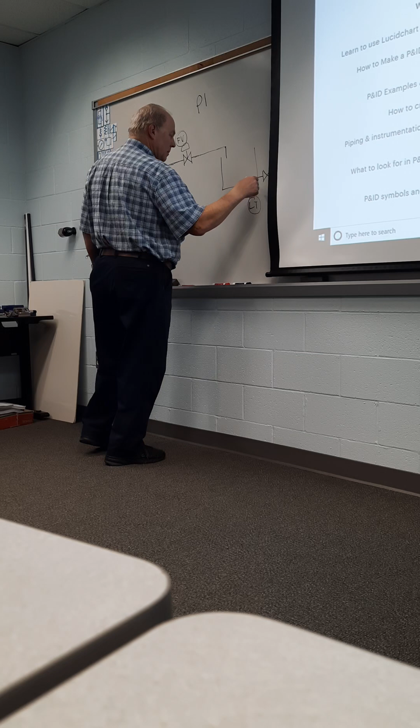If I'm trying to set a rate of flow to fill up a tank, and I have the ability to control the flow here, and also the ability to control the tank level as well. If I want to fill up tanks at a certain rate, I usually calibrate the flow first. Maximum flow, minimum flow. So it does imply that I worry about calibrating this part of the loop first.

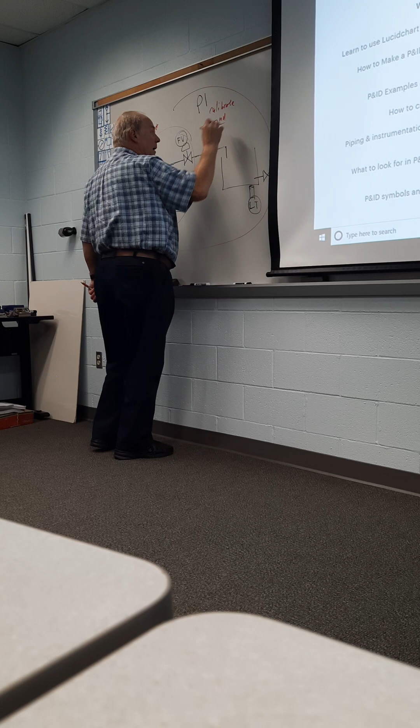Then if I'm worried about the tank level, achieving that, I calibrate that second. I split it into two different calibrations for the system. The reason being is I can go back and forth. If I calibrate this first, it still doesn't take care of the flow, so it may fill this in too fast, too slow, whatever. The overall loop doesn't optimize getting the level I want.

So really look upon this as a component of this overall loop. The overall loop being the measurement, coming back to a controller, that forms a closed loop, just like the flow. If I put a flow meter here, or even estimate the flow, that's a separate loop. This is a case where I want to be able to break that down. Now, it's easier to see if I have it on a P&ID like this. I can definitely identify two loops.

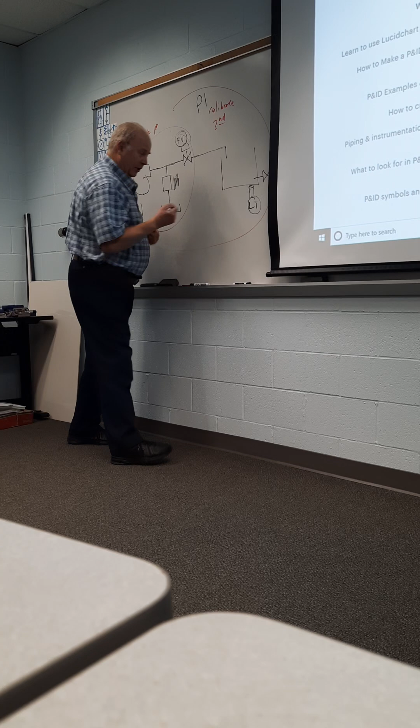This overall loop might be 100, in which case the flow loop here might be 101. F for flow, L for level. Something of that order. And this is concentrating on the flow, where I worry about an estimate for how fast I can fill up a tank, and then filling up the tank afterwards. This might be adjustable too.

This is probably not the entire system, but just a part of it to show why we have subloops. In tuning, we usually want to do the component subloop first, then the bigger loop that incorporates it, treating the subloop like a lower level component. It's a layered approach.

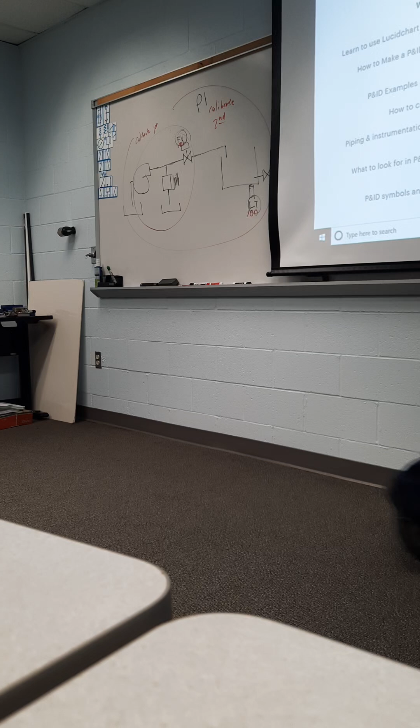A lot of big processes are complicated. There are multiple little loops. And tactics go bottom up as far as calibration. Because for a component to calibrate a valve, like a diaphragm valve, it doesn't really matter what part of the loop it is. That's not going to affect that valve operation. So do that first, get that optimized, working. In other words, I've unplugged it, unclogged it. The bladder's working properly, that sort of stuff, maintained, it's not leaking, because that affects things.

And once that's a perfectly working one, then I work with a small loop here, which in this case would be the flow rate measurement, to make sure I have that correct. And then once that's corrected, then I have a reliable flow that's optimized, and I can worry about what level I get in the tank. But as soon as I worry about the level in the tank, and then recalibrate the flow rate, I might improve the flow rate, in which case that level's getting filled faster than I expected.

Possibly, something else might be going on as well. But you don't have the reaction time for the level. A faster flow rate that's unaccounted for might fill the level of the tank too fast. Later on in the course, when I talk about calibration of loops, we'll see one of the big things is called lag time to make the decision. A quick example of that.

Have you ever had to go someplace and rely on somebody sitting next to you in a car for directions? Yeah. And it's like, turn here, turn there. And what happens if they're late telling you when to turn? Missed the turn. You miss your turn, right? That's the epitome of loop performance. Why are control systems not perfect? And a big overriding thing is this concept of lag time.

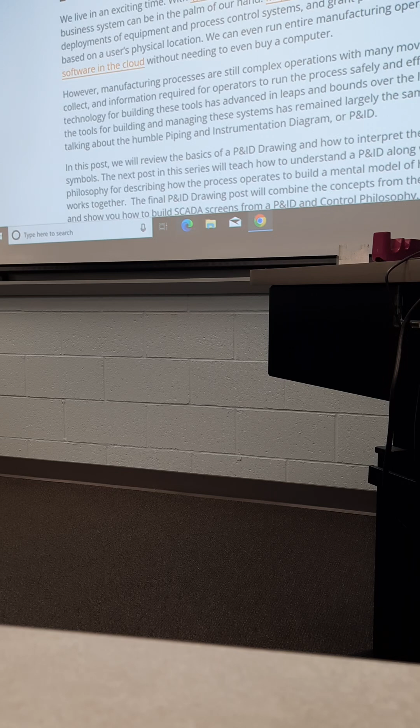I'll jump over to this. P&ID drawings. Corso Systems and process, the basics, a lot of this is review. Example of a drawing. This is a nice, cute little example. How many subloops are there in this drawing? Subloops. Three. I see a 100. I see a 101. I see a 102. So already this is a little bit more complicated than I've been drawing.

And what's the process variable for loop 100? Level. What's the process variable for loop 101? Pressure. And more specifically for nitrogen. And 102 is for temperature. Most likely, you have hot water here that's stored, some nitrogen that's put in, and some vent to it. We also have a heating pad as well.

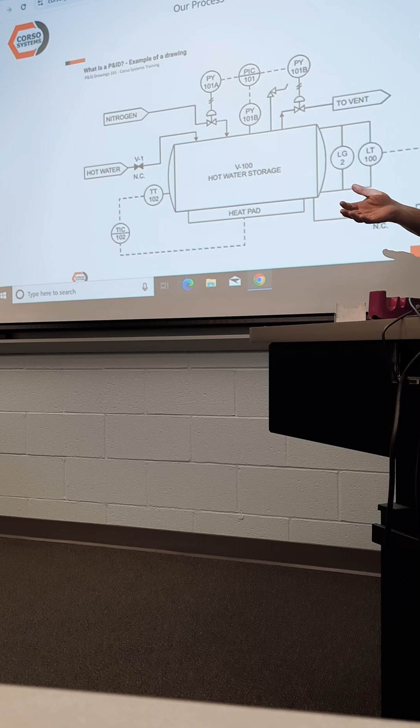Why nitrogen for pressurizing? And this is what this is doing. This hot water storage is storing a certain amount of water at a certain temperature, and pressurized. Of course, why would you pressurize water? What moves it? How do you move it against gravity? We need a force. What's the built-in force for water?

Water pressure. It's kind of like when I turn on the faucet in the kitchen at home, why does water come out? Water pressure. If there's no water pressure, I'm not getting any water out of the faucet. Unless, of course, there's a source of water literally above the faucet. But that's where the pressure comes from. So you need pressure. And why nitrogen in this case for pressurizing the water?

So many people remember this from my MT 131 class. Or Mr. Collins hasn't beaten this into you yet? Okay. I'll tell him he needs to beat this into you.

Remember the ideal gas law, pressure, volume over temperature? And you have pneumatic and hydraulic processes, and the big difference between the two flows, besides one's wet and one's not wet: liquid is known as constant volume. Air is known as constant pressure. Okay, a symbol of that.

If you have a balloon in your hand and you blow it up. When I taught the class I used to give people balloons. And they blow them up, and you get this nice big balloon all blown up here, tie it off. What's the air pressure in that balloon? I don't know what air you put in. It's gonna vary. The volume of the balloon? That's not pressure. What's the pressure inside the balloon? You play with the balloon, you bounce it up and down. It's 1 atmosphere of pressure. Now it's not exactly, there's a small, slight differential.

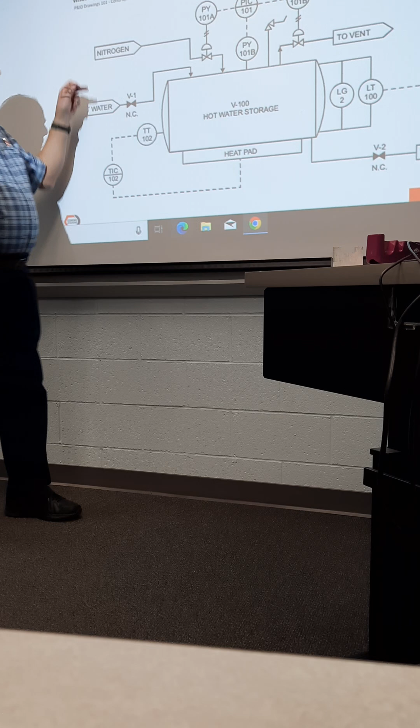Now here, why nitrogen? You can pressurize nitrogen because, again, it's a constant pressure. I can jack that pressure up. Now, if I have a certain amount of air here and I put more water in, what happens to that air? It collapses. So when I have a certain amount of nitrogen and water in here, if I put more water in, the water will occupy more volume. So the air molecules have to collapse. As they collapse, they exert more outward pressure. That's how you get pressure built up.

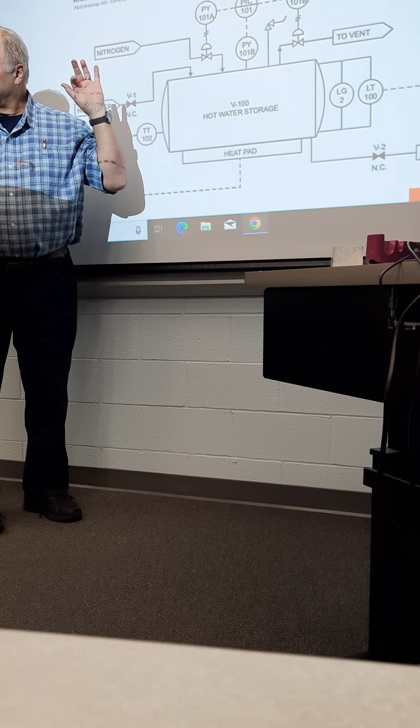Accumulators in the hydraulic system work exactly like that. You got a bladder in there, air trapped in, you jam more fluid into it, it creates more pressure. In fact, it's one of the ways your water pipes break. You have trapped air inside a water pipe, and the ice comes into it, starts to push the air, and finally it creates enough pressure to blow through the copper piping or PEX piping. So this is used to pressurize the system.

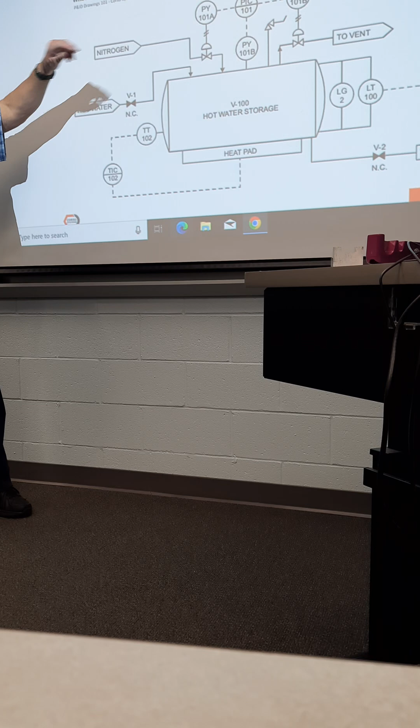And here, if the pressure is not great enough, what do we do? Well, let's look at the pressure loop here. 101, what do we have for control? For pressure, we have three instruments, don't we? Actually, four instruments. You see a PY there as well. Here, everything's called a PY, which is probably not the greatest thing in the world.

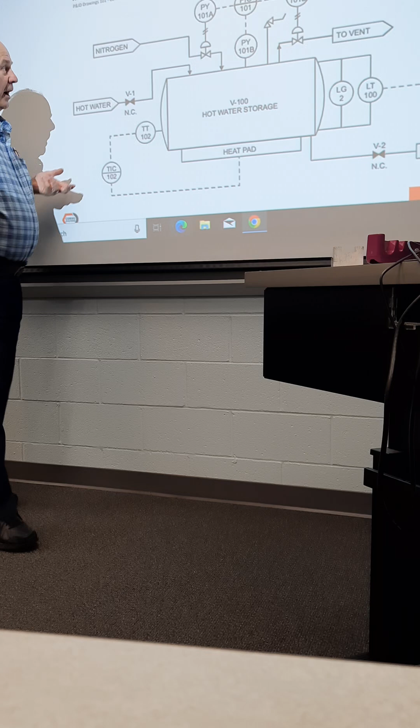These are what? These two devices are the same device, but what is that device? Converter. IP converter. Right, when you have a diaphragm here, you need air. It converts the electrical signal to air to control these diaphragm valves. So they're IP converters. This is probably where we measure pressure.

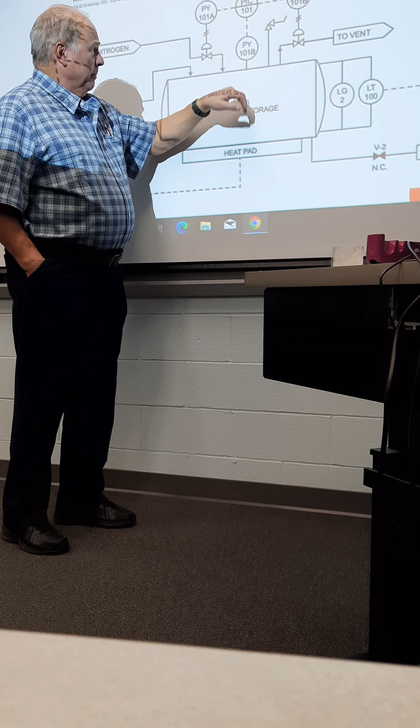You know, it's called a Y, not a T. I'm surprised, the 101B versus 101B. That's not good. And I have a hard time saying what PY 101B is. So that's a mistake in this drawing. This is probably just a PT, is what I would really guess it is, because something has to measure the pressure for that controller, the PIC. That's your controller of the system.

Now, things to note here. The IP converter and the pressure sensor are all mounted where? On the device, basically around that tank. By the way, if you guessed by now, this is the tank. Where is the controller? Primary location, somewhere else, probably a control panel someplace. And does the solid line mean an operator can see it? Most likely. And notice the PIC, I for indicator, so it has some gauging that an operator can see as well as do direct controlling.

That's our pressure. So we have two valves, one going in, one going out. So we control more gas going in, and if there's too much gas, let it out. You probably need both to get a certain fixed pressure in there.

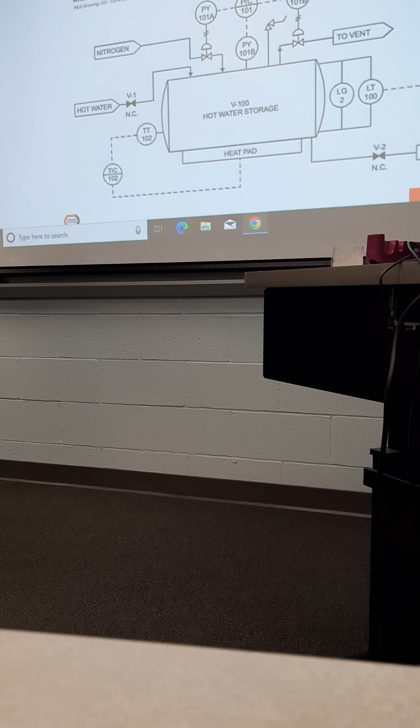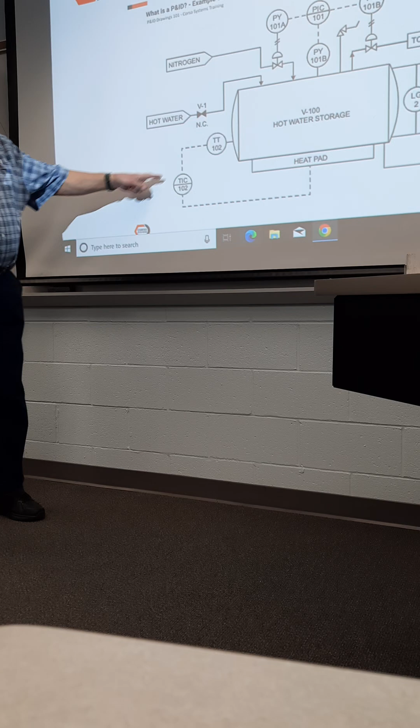To operate the temperature here, how is this done? How many instruments are involved in the temperature control? Two. TT is what? Temperature transmitter, that's your sensor, basically like a thermometer for electrical stuff. And it's an electrical signal. This goes to a controller, and it just directly turns on the heat pad. This is not the power for the heat pad, it's probably separate, but these tend to be control signals. Again, that's mounted in a panel someplace where an operator can see it, most likely the same panel as the pressure indicator controller.

Lastly, level. Now the level here, this is an interesting thing on the tag. We have an LG2 and LT100. If you were to rewrite these tags, what would you most likely put in for LG and LT? A and B? Well, no. D. LDG, LDT. Differential. Why do I guess differential? I'm looking at two connection tubes. So it's probably getting the level difference between the bottom and top. You might use pressure to do that, but in any case, this is a level indication.

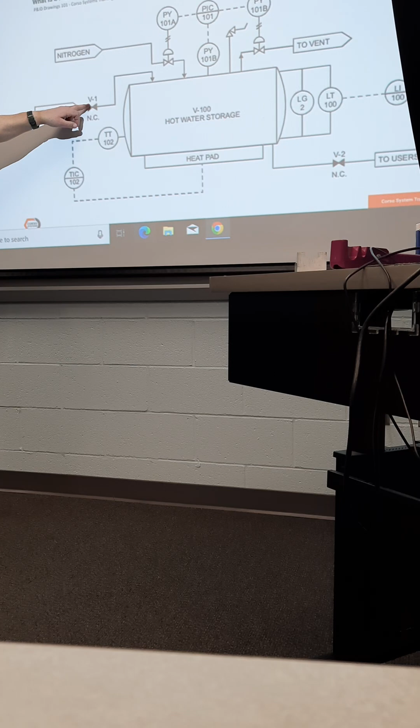The 100 loop essentially, and this just goes to an indicator. So is there any control here directly on level? No, there isn't. My guess is that it's a hand valve job here, or at least manual control. So the only thing we're really doing here is saying how much water we have. And the fact that it's simply an indicator means it directly tells a person. So an operator makes a judgment when to let water in and out. It's probably a manual procedure, like, okay, we need to refill the tank.

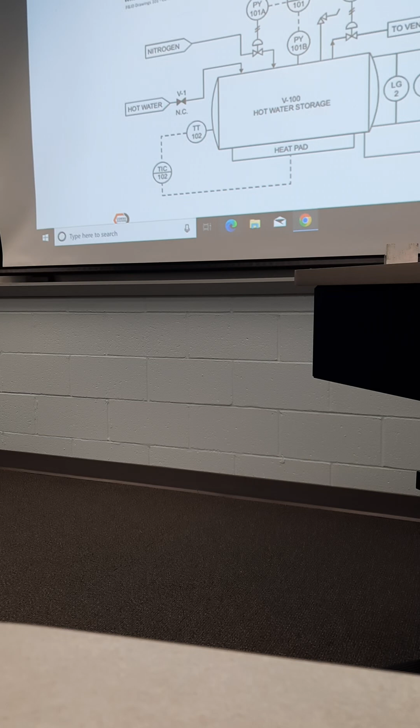Operator comes in here like a bathtub, turns on the spigot, turns off the spigot when the indicator says the level's high enough. And it sits there in storage, nitrogen comes in to keep it pressurized, the heat pad keeps it warm until it's needed, then the operator turns it on again.

And notice that all the indicators, temperature, pressure, level, are all remote. They're all basically on the operator control panel. That panel wouldn't be on the tank, but some operator panel. Same panel, I'm guessing, because it's one solid line, so it's the main panel. There's no remote alternative panel, no auxiliary panels. Between the sensor, which is the LT, and the indicator, it's a remote indicator. If that indicator was built onto the LT, it'd probably say LIT.

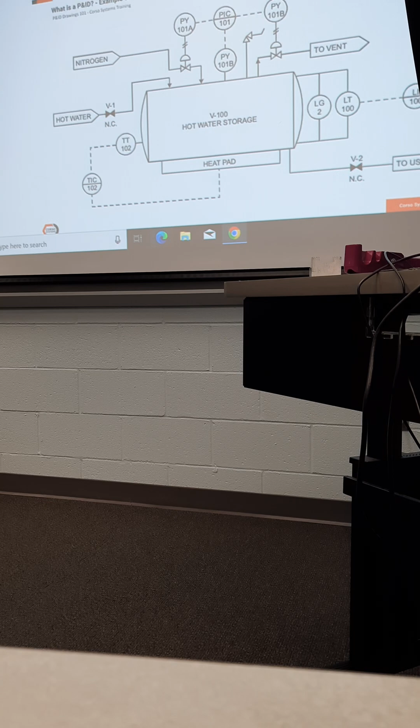Or just LI, because it wouldn't need a transmitter. Those sensors are usually called Ts, transmitters, if they're sending an electrical signal to an alternative indicator source, indicator sink, so to speak, or controller. Their LIs are direct indicators, like a thermometer is a direct indicator. That's how you read this.

So you can see 3 loops, you can kind of guess how it operates, right? We talked through how this operated from this diagram. So this diagram gave us a lot of information. It tells us where the instruments are on here. It tells us what the operation of this is, without ever seeing it before. I've still yet to see the hot water storage tank. I have no idea what the size of it is from this thing. That's true, I don't know the size. But I can pretty much guess a lot of what it's used for.

And there's not a whole lot to this drawing. It's a pretty simple drawing. It's almost stick figure. That's what a schematic should be. The information that's useful, and stuff that isn't, you don't need to see it.

It's like fallen trees in the Amazon. I don't know it, I don't care, I don't see it. I guess I can always go on YouTube and look for a channel that shows me live trees falling in the Amazon, but I don't even know that exists.

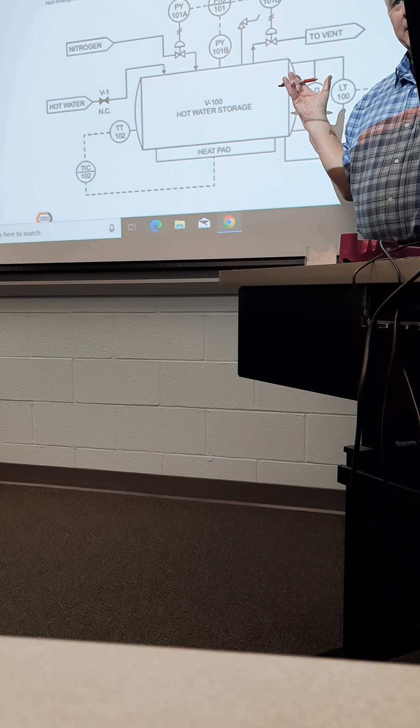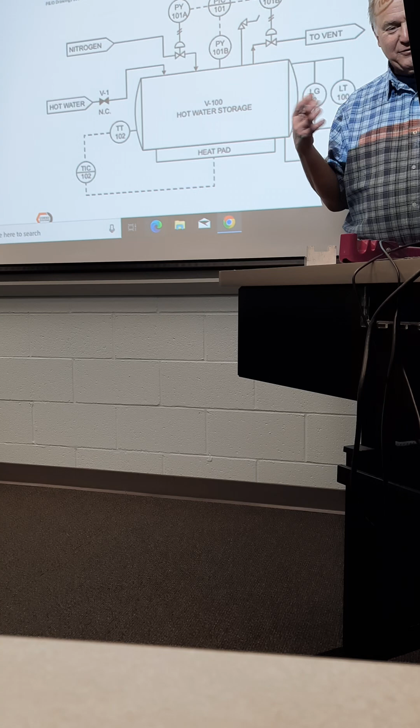It's kind of like if we ever had 2 students with the same ID number in a school here, we'd be forever mixing up your academic records. Forever. And that's not good. Yeah, it doesn't serve the purpose. It has to be a unique name. The instrument tag has to be unique for each device. It's 1-to-1 between the tag and an instrument with its location. We can have 5 of the same model, that's fine. Somehow that tag differentiates.

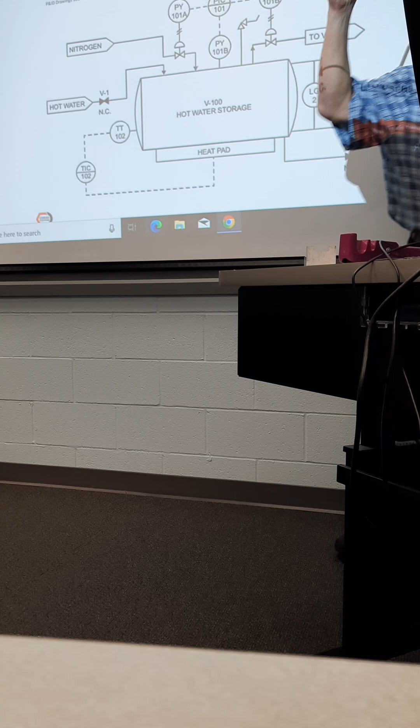And worst comes to worst, we run out of differentiators. The little letter on the end of this 101 is exactly how we do it. You'll see this on the floor as you work through the labs, you'll see a couple devices, usually hand valves, where there are literally about 3 or 4 hand valves, and they're separated by a letter after the end of the loop number. Now, if the loop number is different, that's sufficient. If the loop number is the same, like HV 100, I think it's an A, B, and a C. Then it has to be differentiated that way. It does have to be differentiated.

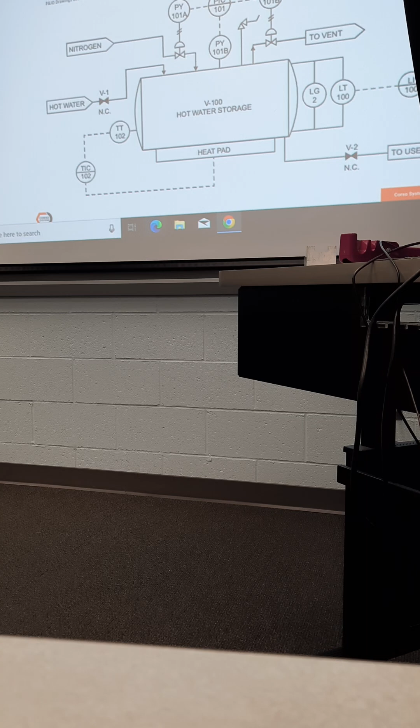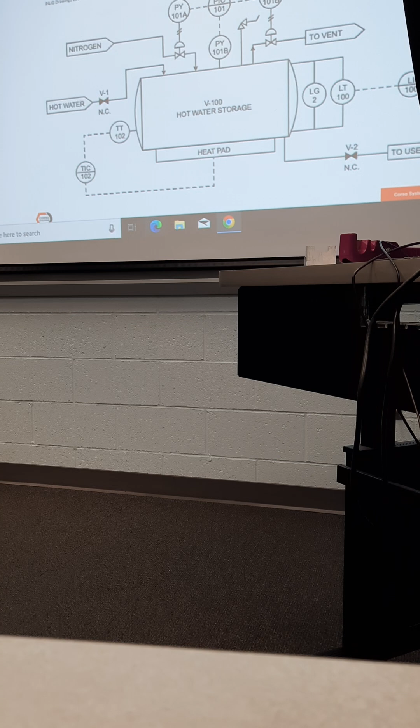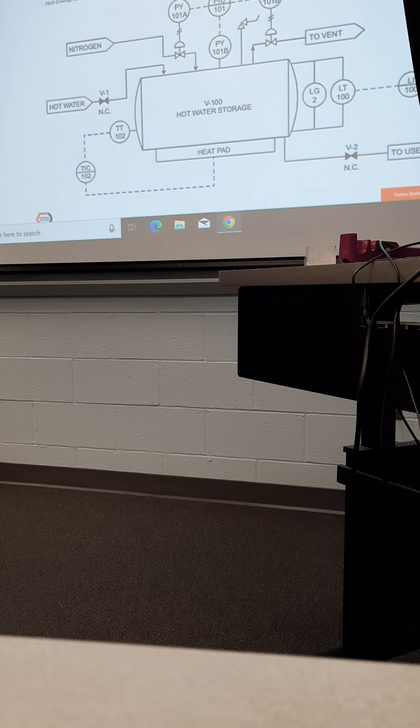One line item is sufficient to cover all those instances if they're the same IP converter. Dayton IP42, IP converter. Notice there's two references here. So there's two places it would appear here. And those references refer to the instrument tag. And the reason is because this is unique. Because usually I look at this, say I need to replace an IP converter. I know I have to replace this one. I look at the instrument tag on the device itself. That's all I really have. I might have a nameplate, maybe not. Usually I don't, it's a small part.

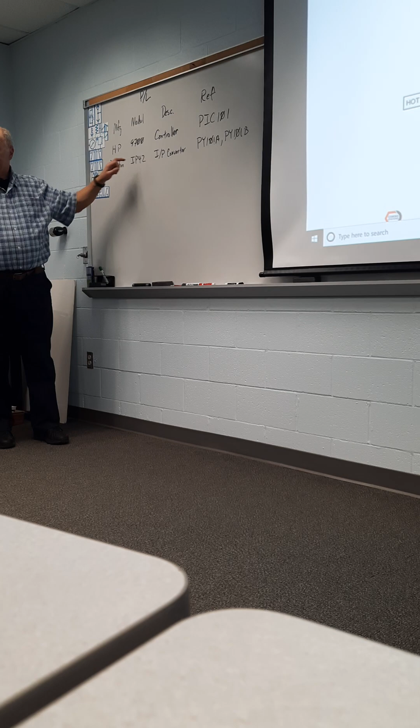But I definitely have the instrument tag. If I have the instrument tag, then I can go to here, and that's what I buy. Get a purchase rec for the company, write that up. Now, when these things are several $100s, I use a purchase rec to buy it. If it's like $100, usually just go ahead and buy it and submit an expense report.

Now, what's the difference between the two? Back in the day, when we used to have to do this all the time, purchase recs, back 30 years ago, used to take $75 to process in the company. Expense reports, like maybe $10. So they didn't want to sit there and buy a $50 item using a $75 paperwork form. So it's always, go buy it, expense it. As engineers, we generally did that.

If it's a huge item, really monster, there's a lot of money involved there, then the purchase rec doesn't matter that much. Go write the purchase rec. Anybody who works in these companies, many times you wind up saying, I need a bunch of butt splices, I need a wrench. The fastest way to do it is usually just buy it from the store, Home Depot, and submit the receipt and expense report. And nobody really questions it because that's a much cheaper process than the purchase rec is. So actually, a lot of companies encourage that.

Now, of course, you try to do that with your 65-inch TV screen for home, and you'll probably get a little bit of a look at it. I saw a 90 the other day.

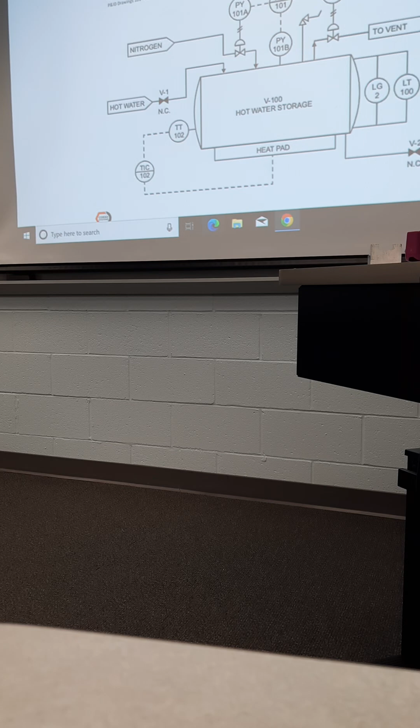What they include. Mechanical equipment named and listed numerically. And when we buy mechanical equipment, IP converters seem an awful lot electrical, and they still consider it mechanical. Just a physical part, component. Anything like that would be mechanical. Valves, process piping sizes, identification. It could on the drawing have listed in a note the size of a pipe. It's not guaranteed, but I've seen that.

None of the examples I've shown you have extensive notes like that. When you get around those extensive notes, it really fills up the P&ID fast. You get these huge things, lots of things going on. We'll see examples later on. That's a lot of stuff. For a first time look, which is what this course is, we don't necessarily show you everything.

It's kind of like learning how to swim, and they take every one of you and throw you in a river. Usually better to do it in a swimming pool, so the couple of you that go down to the bottom can still be brought up top. We throw you in the Savannah River off the I-20 bridge, that may not be an option. Well, tick off Mr. Collins enough and he might be tempted to go, we're learning swimming today, folks. If he does that, be aware, be careful.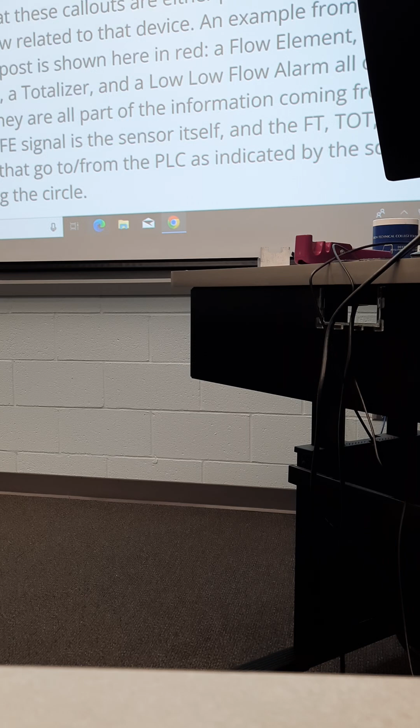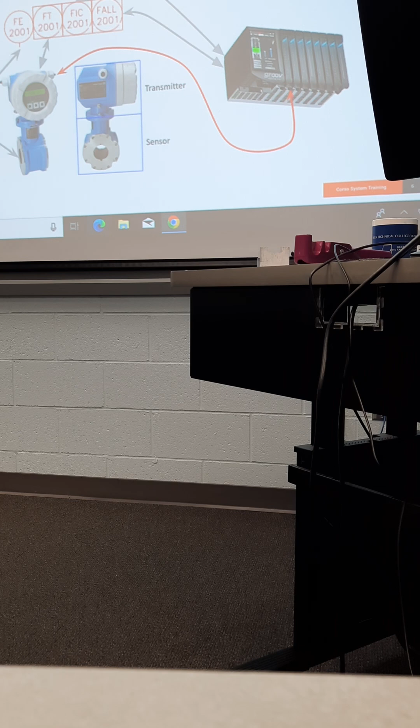So there you go, typical flow meter here, and all the instruments it could be. You have a sensor head for flow, transmitter, the electronics for generating the flow signal here. Indicator built onto it as well. So it's going to have a lot of tags. Notice you have three instruments in one, a sensor, transmitter, and an indicator all built into one.

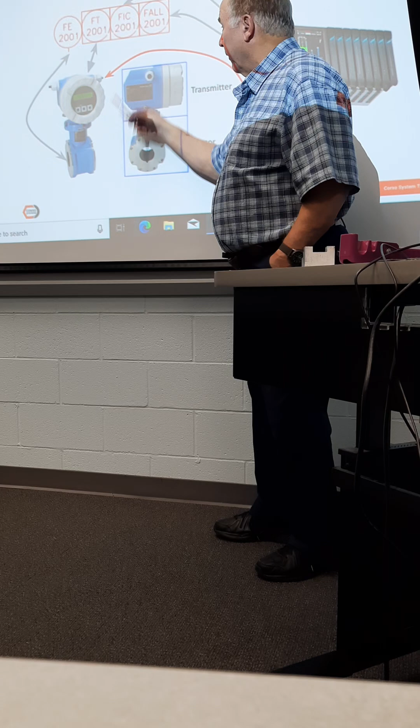So the transmitter section is this. Indicator controller, so this must be the head part, the sphere. And that's an alarm system into that. Flow element, this is separated from here, if you can call it separated, that's a bolted flange. So that's what separates the sensor from this transmitter controller, and there's a controller head here as well.

Now this is a shared instrument, which is why you have this rectangle around this part of it. So it's a mixture in there to look at. As I said, some of the stuff kind of blends. It's one of the things you have in this diagram, but it shows that these are simple instruments that could have a couple tags hanging off of them.

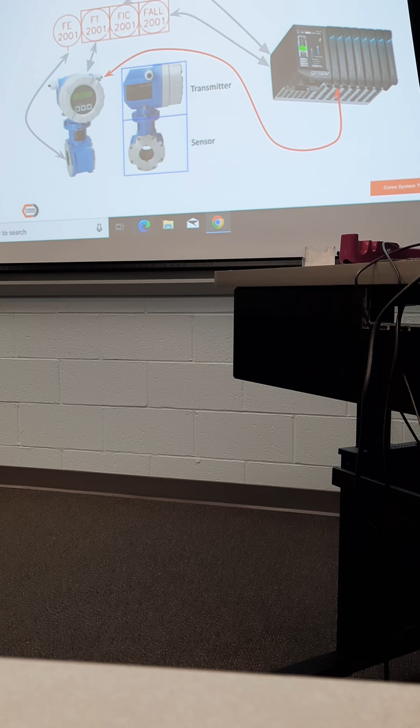And that's probably a good place to stop. We'll talk a little bit more about this and wrap it up next week. I do want to spend a little bit more time than normal on P&ID, because this is a big part of it. Then talk about individual devices and really get into the loops later on, which is where I want to spend a little bit more time than normal, because again, it's a subject that is not well done in Amatrol. But I wanted to at least show the effect of loops and calibration, where it all fits in.